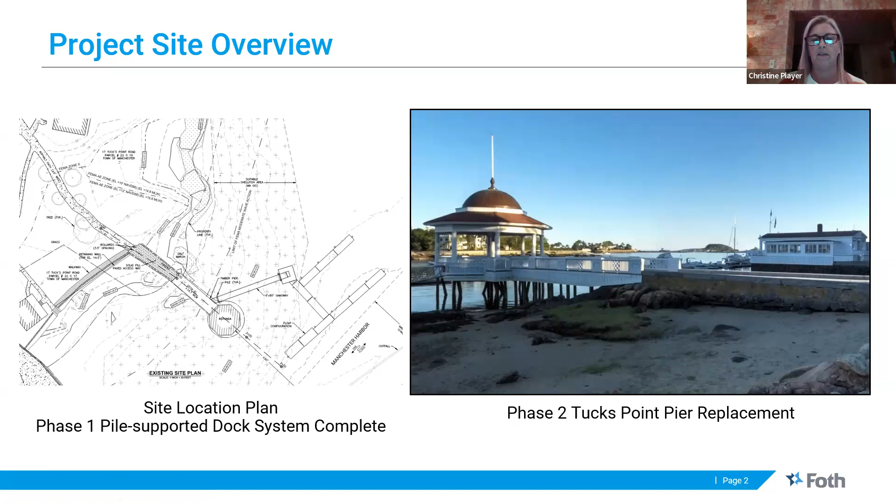So again, just brief overview, context of the project site. I think everyone's familiar with the pier and the rotunda. As I mentioned, about a year and a half ago, we installed a new gangway and pile-supported floating dock system, so that was complete. When we moved forward with that project, the intention was always to phase in the pier repair, and as initially mentioned tonight, the pier itself is in a challenging state. It's quite old. The pilings are getting worn, as I think everyone knows and has seen. We recently did an inspection to allow for the facility to be open this year, but we are looking at it closely. It's on borrowed time.

So the design considerations and the criteria that we use to develop the conceptual alternatives that we're going to discuss a little bit more in detail. We learned a lot from phase one with the installation of the pile system that supports the dock. And that is the project site does not lend itself well to very good soils. As you all see, the outcrops all along Tucks.

We've got poor soil conditions. We've got crazy high bedrock. The bedrock itself isn't of high quality. So what we learned through phase one is the only solution we have out here for piles is a steel type of pile that are actually physically socketed into bedrock.

And that's required for axial and lateral capacity of any of the waterfront infrastructure that we're going to see out at Tucks. So we are sticking with the steel rock socketed piles for the pier, as they were similarly required for the docks that are out there now.

We also are focused on the new pier being ADA accessible. And the goal of this new pier is not only to replace what's out there, but to do it thoughtfully, with consideration for long-term resiliency given all of the future sea level rise and climate change scenarios that we're now being asked as engineers to design for. That would take into consideration a 50-year plus look ahead for this structure, with criteria that address future sea level rise and flooding projections that we've used from the NOAA website, a standard federal site we look to in order to understand the predicted future resulting from climate change.

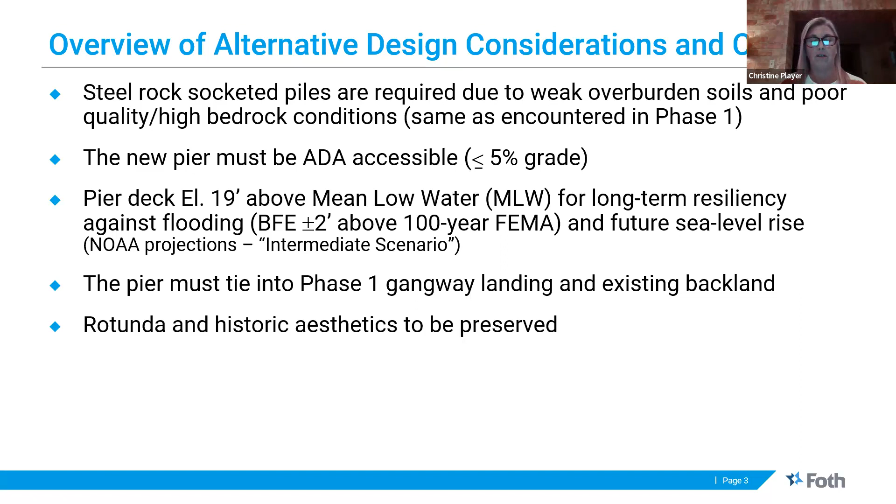When we initially started looking at alternatives, looking at cost benefit, we went through an analysis of different types of materials. As I mentioned, we knew going into the next phase that the new pier cannot be supported by timber piles like they are right now, that we need to go to a steel rock socketed design to resist the lateral and uplift forces we see out at the project site. So there is no alternative being looked at this evening that would utilize timber piles like you see out there now.

A little bit of context: that pier was built back in the early 70s, and it was certainly a bit of a piecemeal effort back in those days. So for a competent, industry-standard design, it is not recommended that we look at timber piles, and that's why we'll continue to move forward with using a steel pipe pile foundation to support the new pier.

Then we looked at the new pier itself - what is that going to be constructed of? We looked at a timber frame alternative versus a steel framed alternative. Everything out there right now is timber. But the advantage of using steel is that you require fewer piles because you can span longer lengths between pile bents. Also, the longevity of steel is certainly maximized compared to a timber alternative, there's less maintenance, and therefore lower capital and maintenance costs associated with a steel framed alternative. That steel framing will be the guts of the pier.

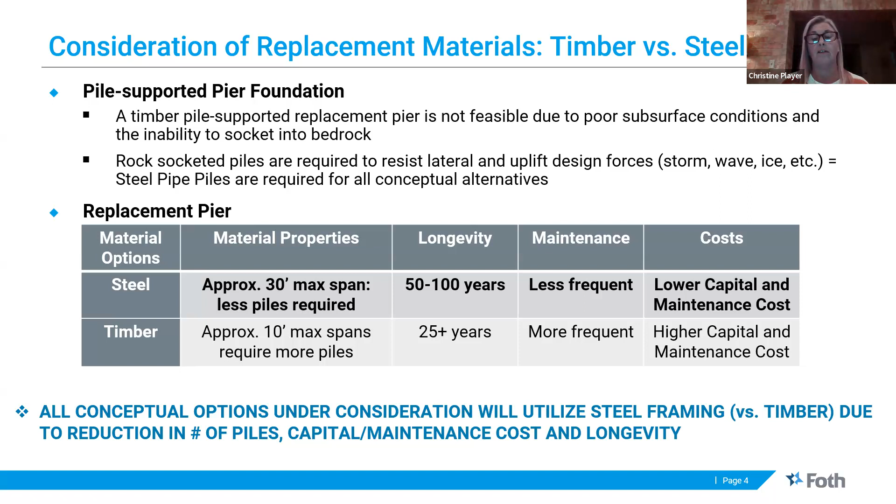Through the two presentations we've given to date, all of this has been presented, and at the end of our last discussion it was decided that the town would focus on moving forward with conceptual options that utilize steel framing versus a timber alternative. Again, that's truly due to the cost benefits we'll see: reduction in number of piles, reduction in capital and maintenance costs, and the longevity associated with selecting steel as the primary material.

So we considered four alternatives, and one has dropped out since our last meeting. Alternative 1, I'll show some typical cross sections and then we'll get into the 3D renderings - essentially reconstructs the pier in the existing footprint. The rotunda will be reset, and everything will look very similar in plan view. However, the deck elevation, currently at 14 above mean low water, will be increased 5 feet, so we're constructing the deck elevation 5 feet higher than it is now.

Alternative 2, which is grayed out and not being considered any further, was an alternative that extended the existing pier footprint about 38 feet more seaward, with the rotunda going out 38 more feet seaward than you see it today.

And similarly, we'd be looking at raising the current deck elevation 5 feet.

Since our last meeting, there have been preliminary discussions with the regulatory agencies, which is a big part of the next steps for moving this project along. Alternative 2 has been dropped primarily because it will likely add an extended timeline to get through the complex and layered regulatory review process, since we're looking at building in an area with no prior construction. Maintaining the current pier footprint is an advantage because it's an authorized structure, and constructing within that existing footprint has a major advantage. Once you go outside that footprint, you encounter challenging permitting review. So it was decided not to pursue an extension of the existing pier and push the rotunda further seaward. Alternative 2 has dropped out of contention.

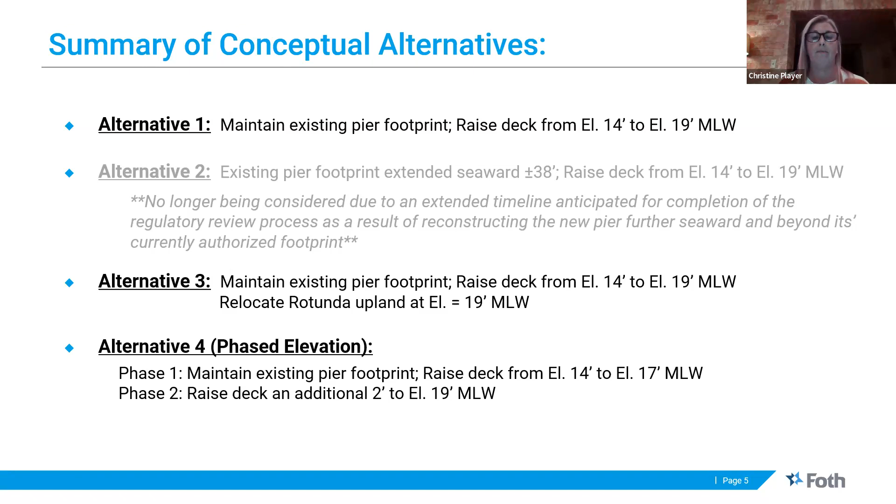So I think decking is a next step conversation. Right now, we've just costed out things on a very high level, assuming timber, but certainly there are other materials out there that might cost a little bit more, but might have lower maintenance options, and may last a little bit longer. So the goal right now is not so much to get caught up in that minutia, knowing that there are other options we can look at. I think the goal here is to identify the alternative to advance, and then these conversations happen when we move forward with a selected alternative. But those things do exist and the conversation should be had. It's just not part of the presentation at this time. It's more important to figure out what alternative to advance, and then we can take it from there.

I have a Zoom question from Sandy.

Sandy Rogers, 82 Old Essex Road. Really quick question, given we've had some pretty high tides, what is the state of the rotunda itself?

And I'm presuming that all of this is keeping the existing structure, or does that structure have to change at all? The idea is to make whatever repairs are needed to the rotunda as part of this project, but from a more general viewpoint, it's to reuse and preserve it. There's work that has to be done in that context, but certainly if there are things that need to be replaced and repaired, the idea is not to replace the structure, it's to reuse and preserve as much of that structure as possible as part of this project.

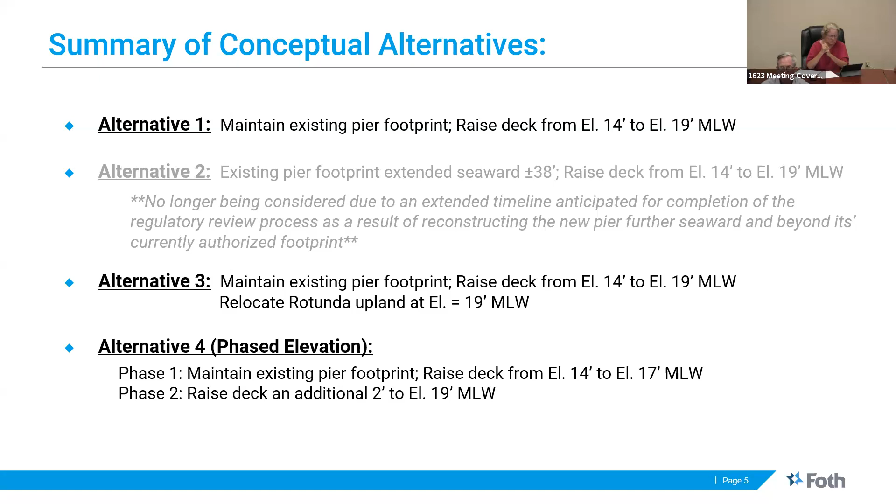Great, thanks. I have a question from Jim Starkey. Yes, Jim Starkey, still at 13 Tux Point Road.

I would just like to point out that we know we need to go to 17, but we don't know when we need to go to 19. And since nobody has a good crystal ball and nobody has anything approaching a verifiable model on this, 19 might not be enough. And if we needed to go to 23 or 21, money spent raising it to 19 would be completely wasted. So I think giving us the flexibility when we have completely no idea what the science is going to turn out to be is a very important thing. Thank you.

Just to note, the cost differential between phase one of alternate 4 and alternate 1 is pretty minimal, a couple hundred thousand dollars. I think that's your next slide, Christine.

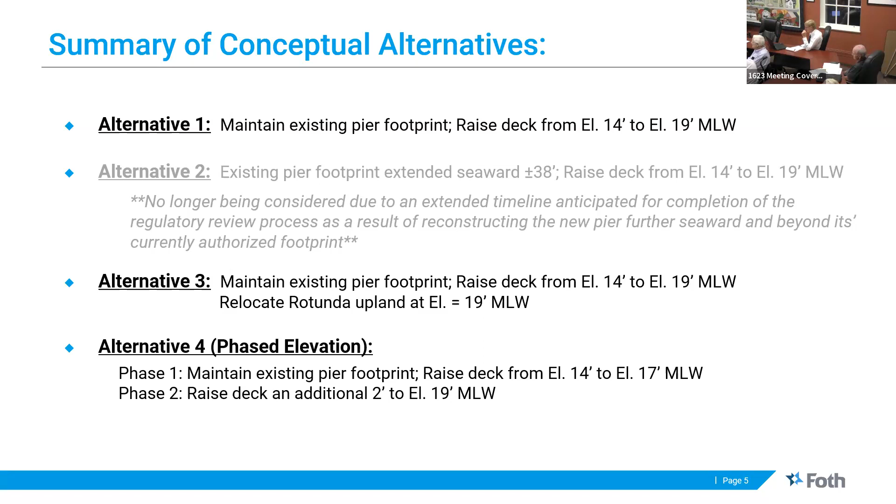Oh, Christine, so okay, why don't you make sure everyone's done talking. Why has my—oh, you've got to be kidding me. Well, we're frozen.

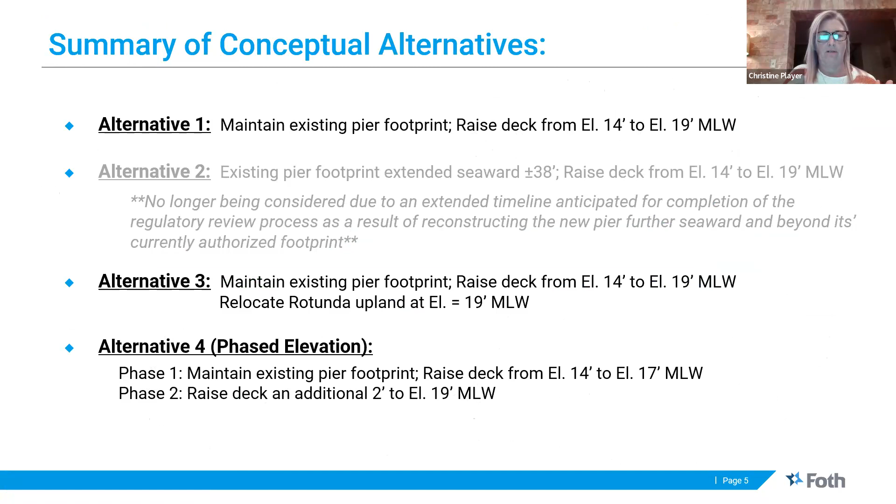Yep, we're unfrozen. Do you want to go to cost right now, or do you want to just kind of quickly look at what these look like? Your call. Quickly through the remaining slides, but please try and be brief.

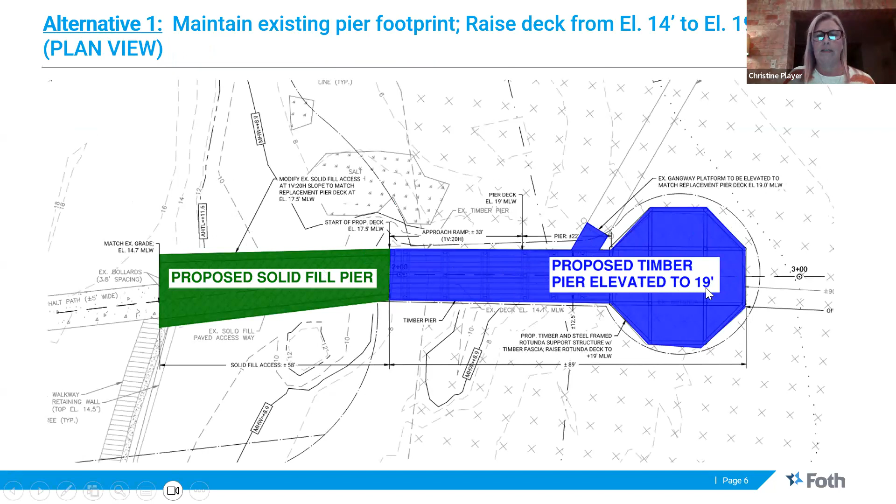Sure thing. So these are just real quick viewpoints of plan views of each alternative, just to get the idea—we've got a solid fill pier, we've got the existing pile supported timber structure with the new gangway platform and the rotunda platform. Alternative 1 will elevate this blue section from 14 to 19, like we said, and the solid fill pier will ramp up to meet the new structure. You can see that in this cross section.

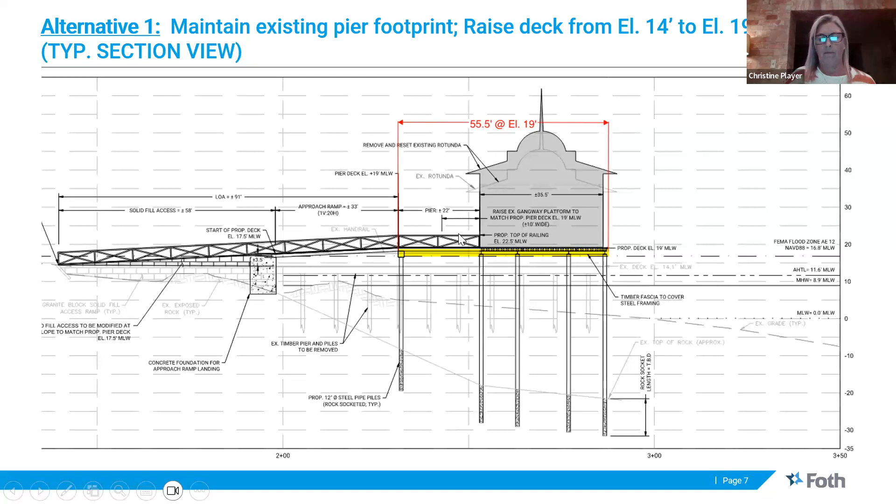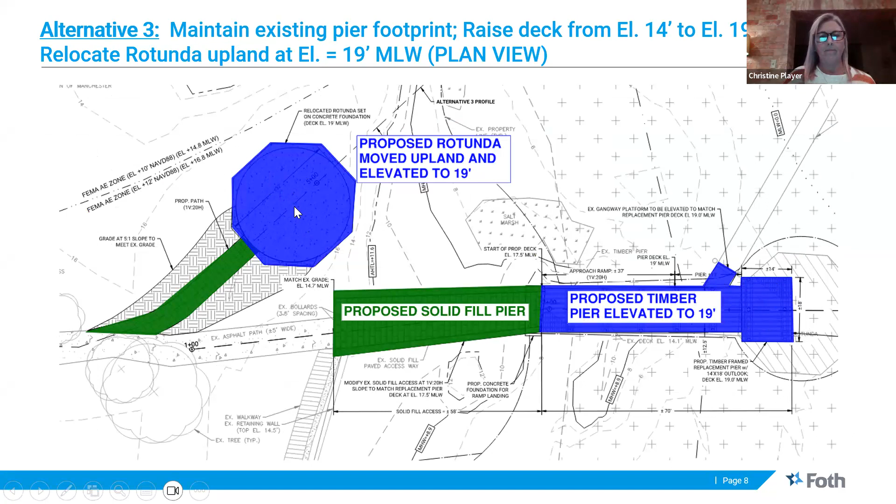Alternative 3, as we talked about, the difference being we dead end the current configuration for more of a viewing area, and now the rotunda is moved out on the outcrop a little bit to the north. Similarly, we still have to ramp up because the grade elevation at the backland isn't changing—we're trying to get to 19, so there's a very gradual ramp up. Then we have a flat elevation of 19, about 37 feet long, ties into the gangway, which is here. But we square off the end, and then the rotunda will be out on the outcrop, at elevation 19, and that would be just on a concrete platform.

I have a question from Sarah Pierce.

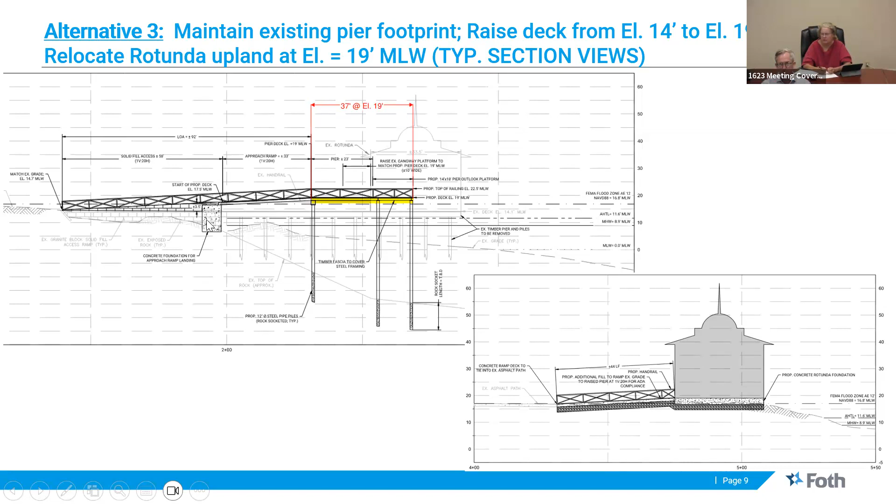The short answer is that the new piece of buttressing is currently scheduled to be concrete rather than granite, but we could change that - that's a detail, and we could change it later, after we've chosen one approach and gone into finer engineering. There's ways to put granite facades, there's all kinds of nice aesthetics we can talk about. Again, going back to the idea of making the selection of the alternative and then really honing in on these kinds of details - but that option is there.

Did that answer your question? Yes, I wasn't aware of the large concrete section after you're doing the initial ramping up. I just also had a question - has there been any settling of the area where you're adding the block? Which I think would, in all honesty, look very industrial if you just left it as concrete blocks above grade. That's just my opinion, but other than that, I just wondered if it's settled in that area.

So this is all built on rock - you can see the outcrop. So there's not a lot of settling going on because underneath is the ledge, and that is a desirable foundation for the type of loads that are going to be on here. It's pedestrian loading, and we're not putting cranes and big heavy equipment here, so we wouldn't expect to see settling with this proposed alternative.

I thought previously you said that we had issues with the rock outcropping quality or something - maybe I misunderstood you. So that is for the support of the piles, that only pertains to the piles and socketing these piles. The piles have very different loads - they're in the water, they have wave action, they have ice action. There's a lot of different things going on with the pile based on pile design versus this type of design for a stub abutment. The rock should be fine to support this, but we need to get the piles into competent rock and socket them in place for the forces that are going to be acting on the piles.

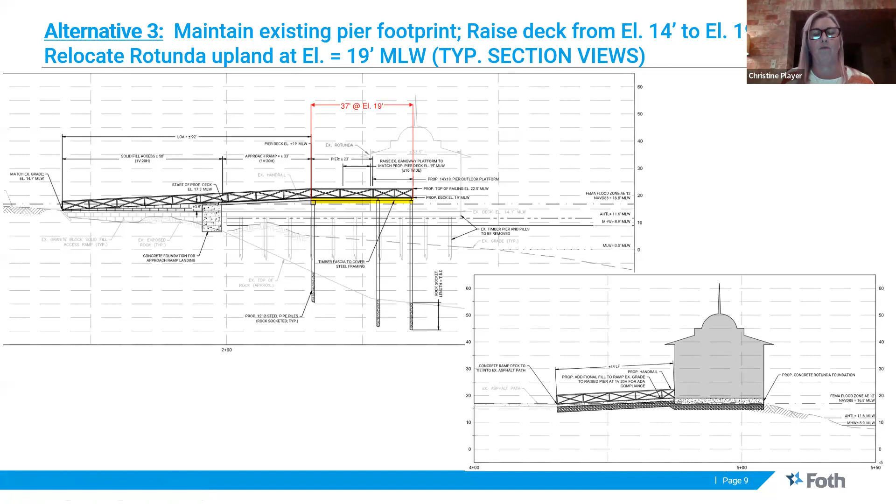Okay, great. Thank you for clarifying that.

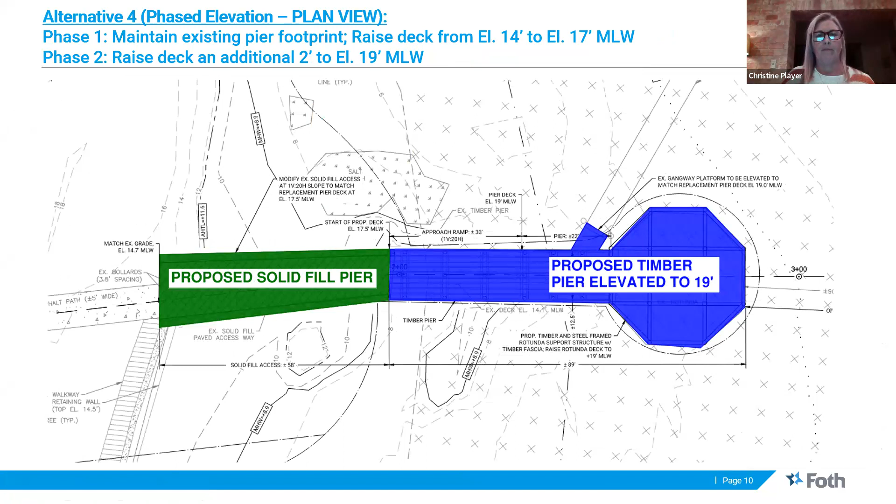Sure, all set with this one, moving on to the next - this is our phased approach, again very similar to alternative 1, same idea that we're ramping up, but this is only phase 1. We don't have to do anything to the solid fill that we were just talking about - that can maintain its same elevation. We're not adding any courses because we're able to maintain ADA accessibility, ramping up to the same flat elevation of 19 like alternative 1, but because we're only going to 17, we don't need to get this area elevated so that we maintain the slope approaching the pier, because we're only going to 17.

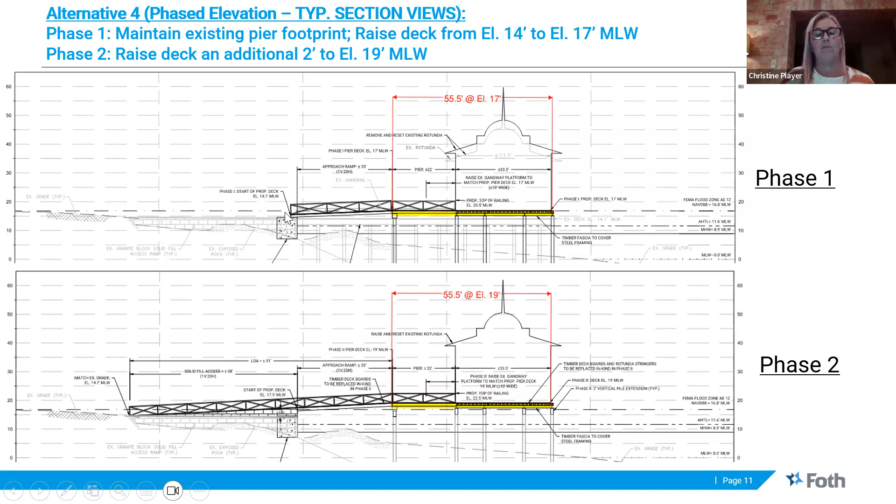When you get to phase 2, we're going back to the final elevation that alternative 1 accomplishes, and that's 19 feet. You'll see the same thing here. Now we have to add more to the solid fill because we need to keep the ramp slope ADA compliant, and to get up to 19 we have to bring this back further and ramp up. So that's where you see the change. One advantage of the phased approach is that you're not required to do anything to the solid fill area, that granite block area, immediately, but that would be modified to transition from phase 1 to phase 2 to get the pier to its final elevation of 19.

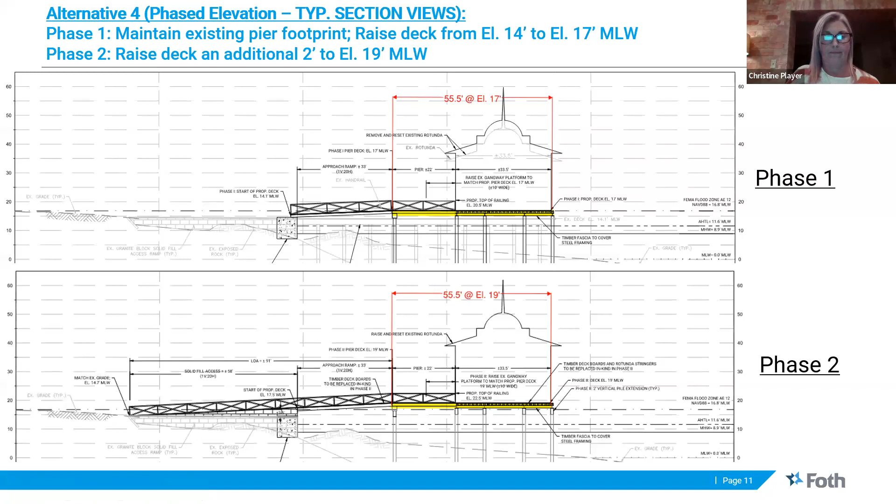So, yes, here's some... oh sorry. I just have a very quick question. So is the phase 1 estimate 2.16, and then in 25 years another 3.59, or is it? Let's get the picture up first. So that's an additional, she just said, yeah, so. Yeah, so basically, 25 years.

What we've done is costed these as very rough cost estimates just to give context for what each alternative comparatively offers the town. You can see with alternative 1, we're at 2.25 million. Alternative 3, where the rotunda is going upland, is a little less money, 1.75 million. But when you get into the phased approach, phase 1 only goes to 2.16. It's a little less than alternative 1 because we don't have to do anything to the granite block approach area. So that's your initial investment.

Assuming phase 2 happens 25 years out, we're able to project costs based on roughly a 3 to 4% increase to material costs due to inflation. So it would cost $3.5 million to take the phase 1 structure and convert it and elevate it to accomplish a deck elevation of 19, which in the end gets you to alternative 1. So when you add phase 1 to phase 2, albeit over a 30-year period, you're investing more money because things cost more in 25 to 30 years. So the total cost is 5.7 million with that escalated projection added on to get you through phase 2 so that you accomplish the deck elevation of 19.

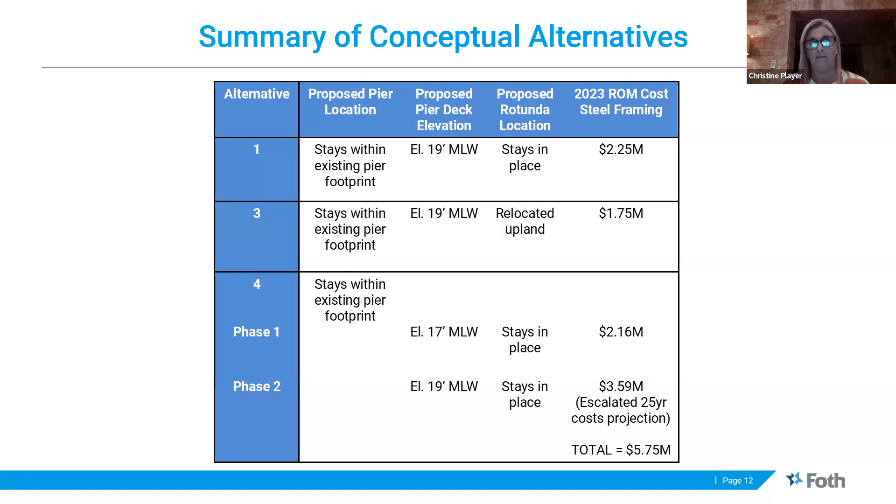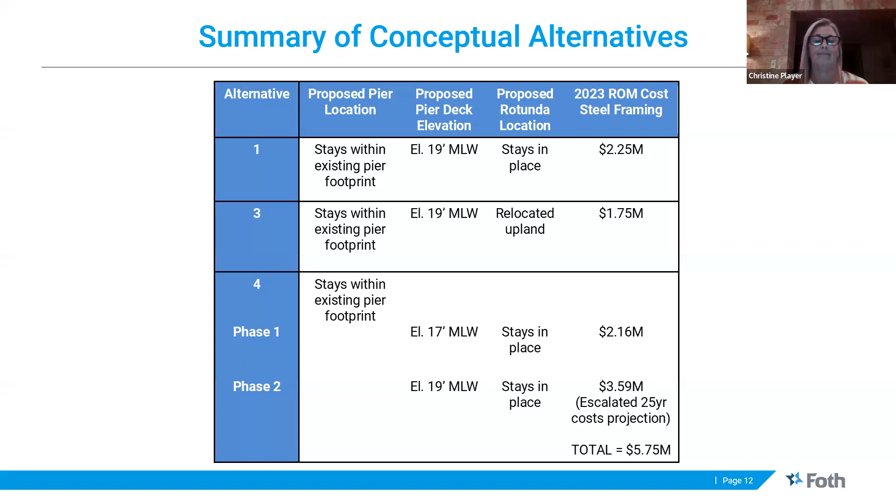But it looks like a big number because it's 25 years out. And if I thought 25 years ago what a project like this would cost, and I see what it costs now, that number really doesn't seem that bad, because this type of project 25 years ago certainly didn't cost $2 million.

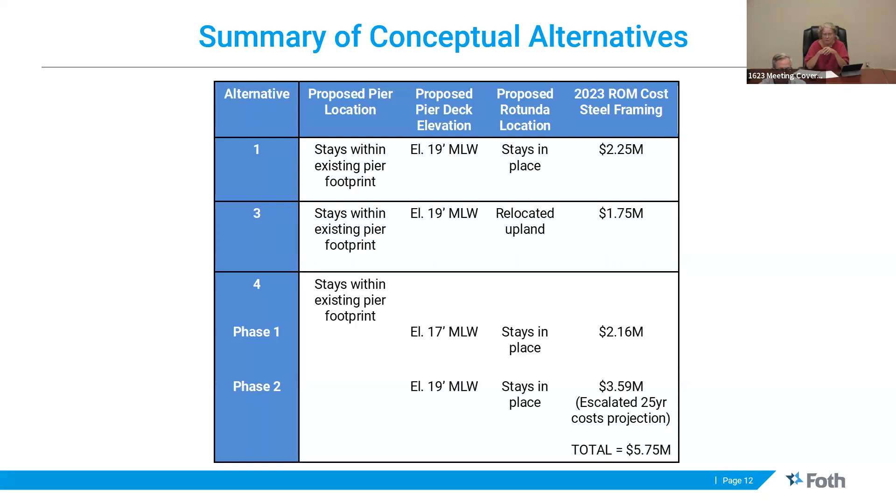I don't see any hands. Oh, do I see a hand? No. Okay, can we go on to the next?

So we're moving to the renderings, and I'm hoping that you guys can really see these things. We're trying to compare things side by side to give you the visual experience that we took away from comments last time. So I'm just going to walk through the three alternatives. Hopefully visually you guys can see everything clearly, but I think it's really about just generating the conversation.

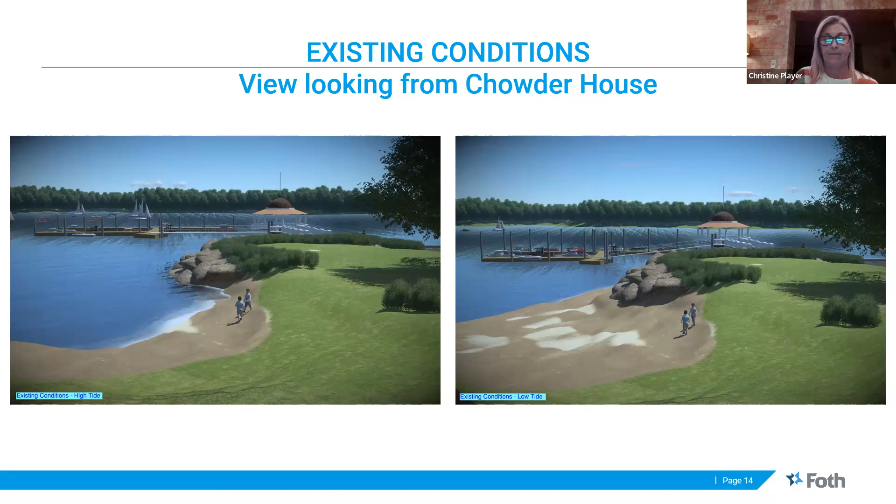Looking from the other view we've selected to share with you folks, what does it look like during the two different tide events currently. So when you're on the beach, at high tide you're not seeing a lot of the exposed pilings, but at low tide you are. And these pilings are timber right now, so they're that dark creosote-coated timber that you see out there now. So this is just trying to put the context of what you see now from both of these viewpoints.

And then the next slides. Before we go to the next slide, I have a question - Carly Cook, One Masco Street.

And that's just a normal, everyday high tide? That's not an extreme tide, or a storm tide? That's just a regular 10-foot typical high tide? Yep, if you were on the call for the last presentation, we had a video of an extreme event and the whole deck is underwater. So this is not that - this is typical daily tides that we're showing.

If I may, the last few times I've seen it recently, the bottom rail is completely submerged, and it's not a full moon or anything like that - it's just a regular tide. I would like to say, because I've seen at a regular high tide, not a moon tide or storm tide, it does appear to look higher than that, and I have photos I could show. I think what they're probably using is mean high water and mean low water, not extreme conditions. With the full moon or new moon we do get higher tides - right now the tide is 8.5 feet or something, and on the full moon it's going to be 11 plus feet, so that's the difference you're seeing with the moon phases. Let's not have a conversation between - may I just ask a question?

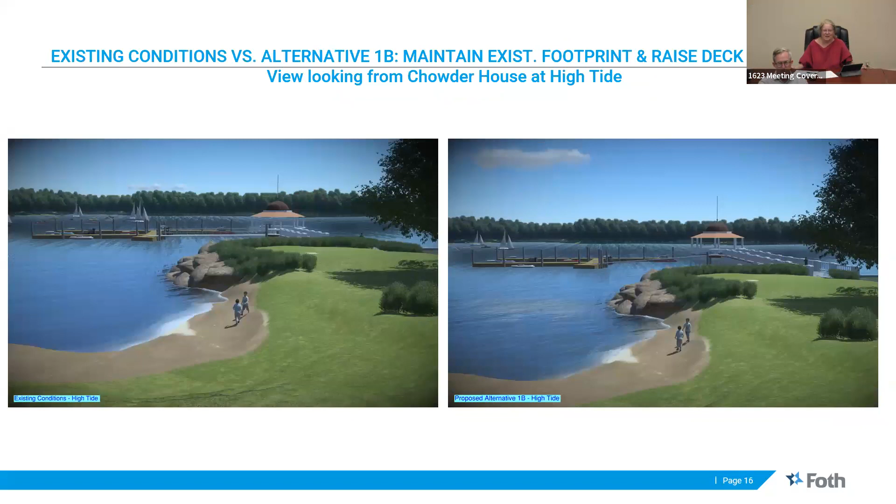So what we're trying to do in the next round of slides is take each of the alternatives we just discussed, 1B, 3B, and 4B. The B just signifies when we did the initial concepts, A was timber frame and B was steel frame, but we've gotten past that. Everything's going to be steel frame now.

So this is your existing conditions out there now, and what we're trying to compare with these side-by-side renderings is what it will look like, alternative one, when the deck ramps up to a new elevation of 19 under the same tidal conditions. Right now you see pretty much a flat gangway at high tide, but because everything's coming up 5 feet, now you've got some ramping on your gangway. It just makes sense, things are coming up higher.

The idea is to give you the visual of what it's going to look like when this deck goes up to 19 during typical high tide conditions.

One thing I'll point out from phase one, I don't know if you can see it clear on the screen, but the top of the pilings now supporting the float were designed for future high tides. One advantage to raising this elevation is it puts it into a more normalized context. You're bringing up this platform and that view is now higher.

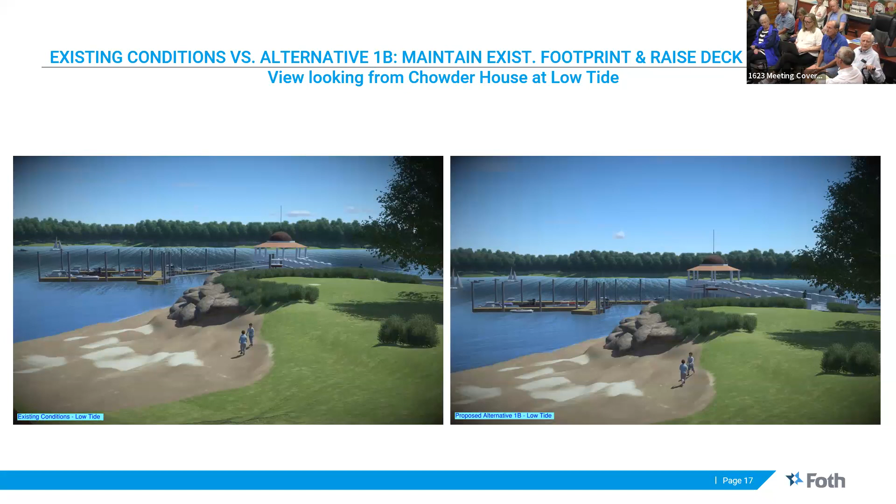And who knows about tsunamis, and the Canary Islands starting to fall apart. Let's go see how the renderings look of those, but I appreciate your points.

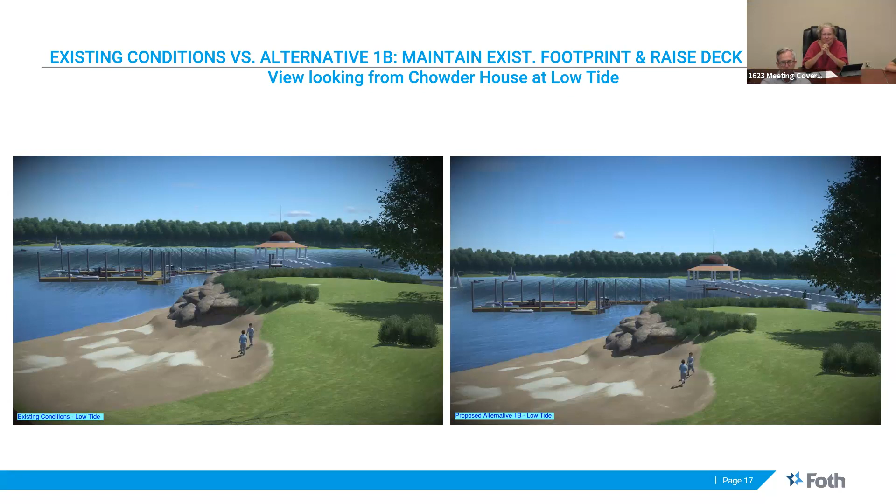This is the view at low tide, exposed pilings. Again, we just have a little taller piles, but this is what the view would look like comparatively—what's there now versus what there would be resulting from implementing alternative 1 and raising the deck 5 feet.

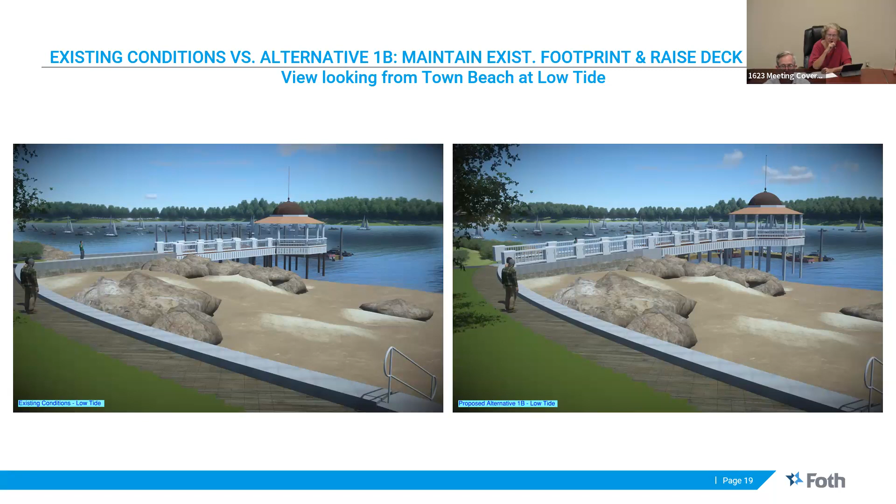Oh, you mean the low tide? Oh, the high tide mark. So kids who jump off at low tide don't generally graduate. No, but even at high tide, it would still be a higher drop. It's a bigger drop. You're gonna have to be a braver kid. Shorter, yeah.

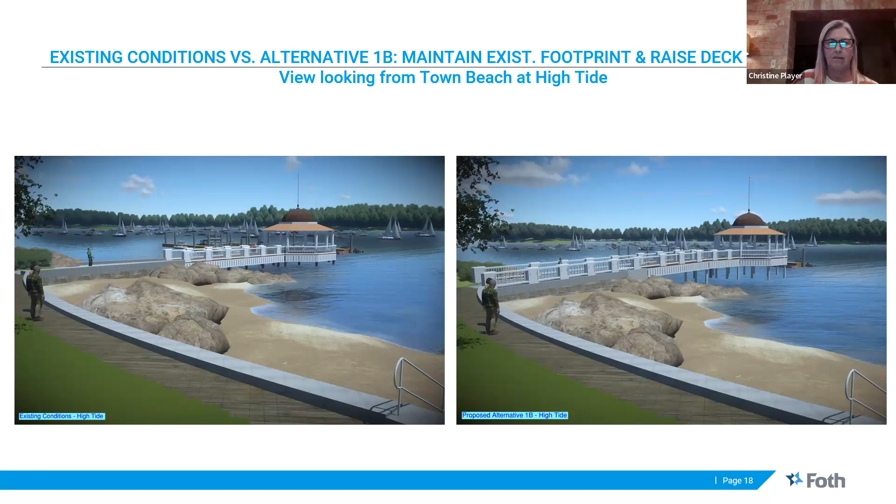I think that's kind of outside the scope of this. Right, but we're concerned, so many people, about having it in the water. And so if it wasn't that lengthy path from the beginning, why are we so concerned about it? When it was originally built, it went out into what is now the channel. It went out probably twice as far. It was shallow. It was much further out.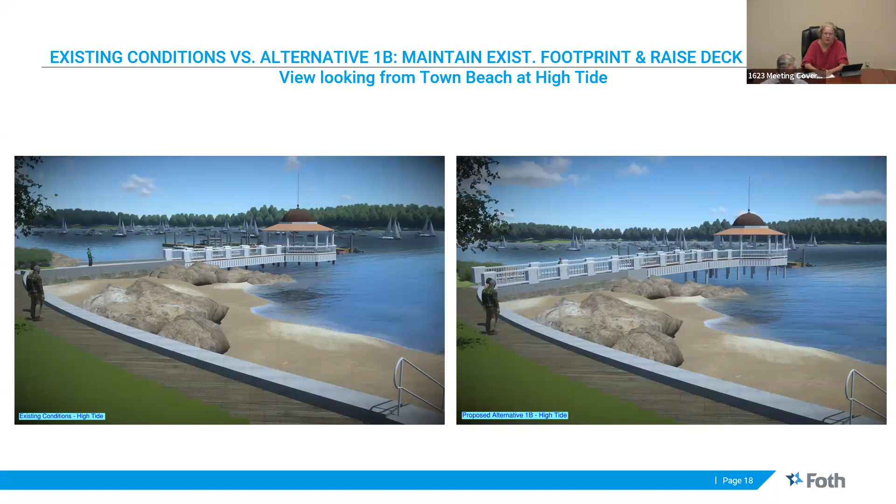Sorry, enough of a diversion to amuse Ann. Let's see the next set of slides. So we're going to the next alternative.

Similarly, at low tide. Steve Lawver, 97 Pine Street: So what would the elevation be if the rotunda was on the knoll? That's at 19 as well, so the rotunda will be at the same deck elevation as the pier.

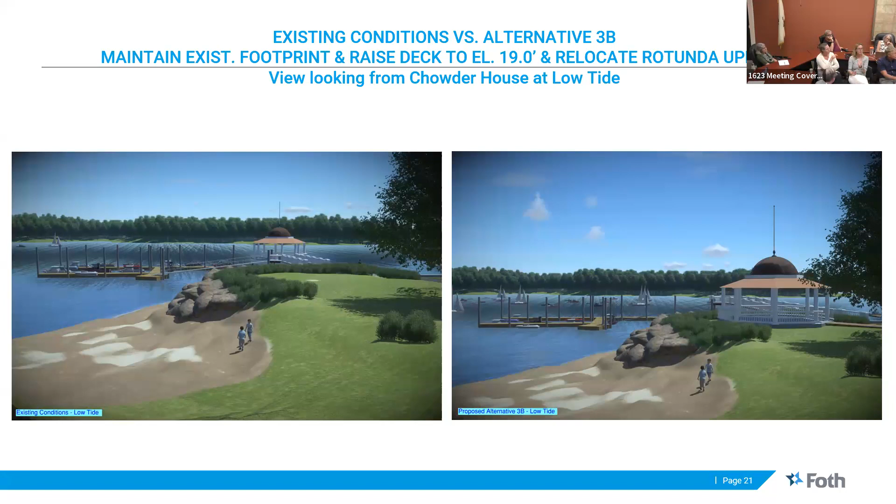Monica Taylor, Proctor Street: What's at the end of the pier though? You'll see that in the next view. Yeah, so again, because the rotunda on the knoll is blocking your clear sight line to the pier, but from the beach, you can definitely see the difference, right?

We're dead-ending to more of a viewing platform. You could put benches out there. We could talk about what the final desired size is for this viewing area, but you can see a very different look to the pier without the rotunda. This again is comparing the water at high tide, but there's definitely a different look. The pier is just as long as it is, it's just that we're squaring off the end, and it doesn't have the big octagonal shape to support the rotunda.

And then at low tide, again, I think you see that—because we're limiting ourselves to two different viewpoints—certainly from the beach area it has a different feel and look to it than from the other viewpoint.

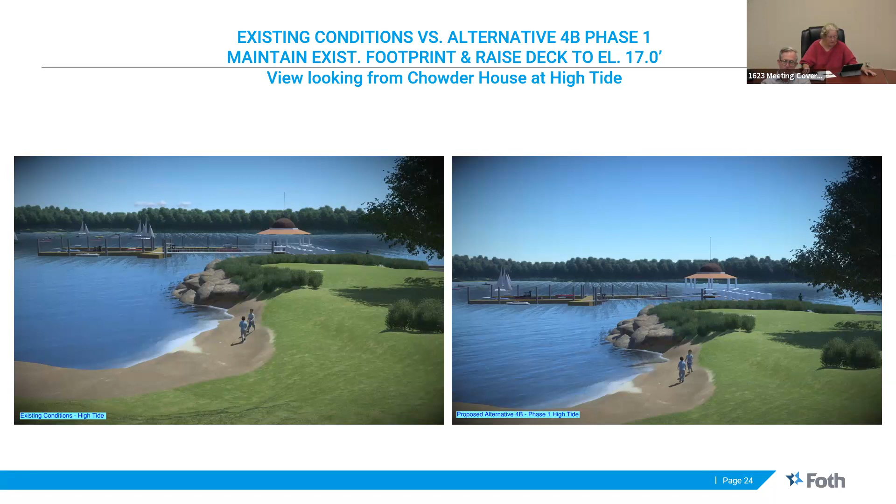Okay, hand is down. Can we go to the next slide? So now we're looking at the high tide of phase one for alternative 4, and the difference compared to existing is we're only elevating to 17. Again, it's 2 feet less than the final 19 elevation. So there's a little visual difference when you look at high tide compared to low tide. This view, it's hard to see, but we're only elevating the deck to 17 under phase one.

And similarly, Joan Logan, you have your hand up again. The floor is yours. I don't know whether you're still muted or. Yeah, I'm sorry, I was muted, I'm sorry.

That's fine. I'm asking why, if this was the case, when the pier was extended, why wasn't this option given to us at the moment to raise Tucks Point at the same time, the rotunda? Why couldn't the rotunda be raised then? Why are we putting this all out this time later if this was discussed at that moment and it was considered that we needed to raise it at that time? Am I clear, is my question clear, or am I not? Let me restate it in case you would like to know why it is that we did a whole bunch of work on the floats, and now we're coming around for a second time to do a whole bunch of construction in the same area. Why didn't we do it all at once? Is that fair? That is correct. Thank you very much. Yes, thank you.

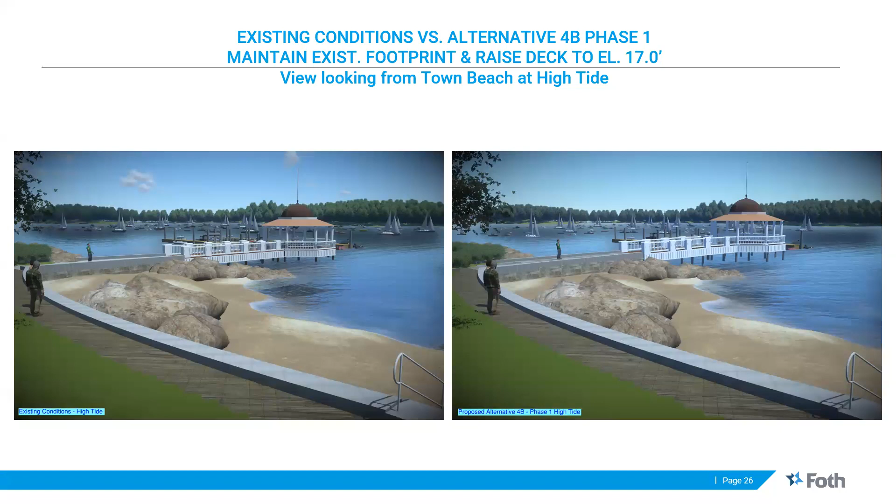I do want to point out again, we talked about it, but trying to share visual observations, because you're only going to 17, we don't have that railing here right now because we're not changing that solid fill, since we didn't have to ramp it up to accommodate an elevation of 17. I wanted to point that out because I know people were noticing that the railing on the other alternatives came further back, and that is because we had to elevate the fill to get everything up to 19 in all one construction event. But here with the intermediate, you don't necessarily need to deal with that right now because we don't have to do anything to that solid fill area, the granite block area.

Ronnie, you have a question? Are we done with this? I just want to talk about the tide a little bit and the facts of what the tide is really doing and what we need to deal with, not some 6-foot rise or some such thing.

This is Mr. Capello, Lenny Capello speaking. But only because whomever is going to be doing the minutes, thank you.

Go ahead, can I just give a little background? I was born here, class of '68 in high school, studied oceanography, marine and coastal geology at Penn State, 30 years in the Navy, worried about the tide every day. And I've seen tides all over the world. The experts on our tides are NOAA, the National Oceanic and Atmospheric Administration.

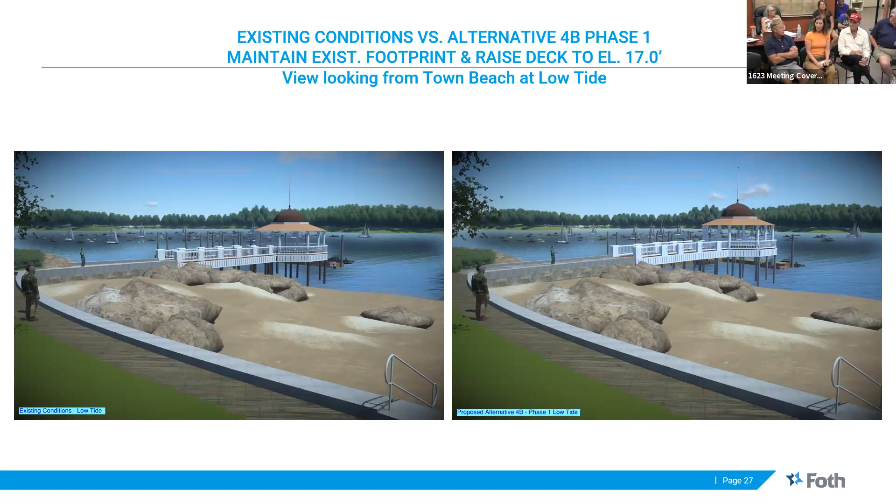Are we done with that? I want to hear from everybody who is willing to speak. I have one question: on option one versus option four, is the stone pier being changed in either of them?

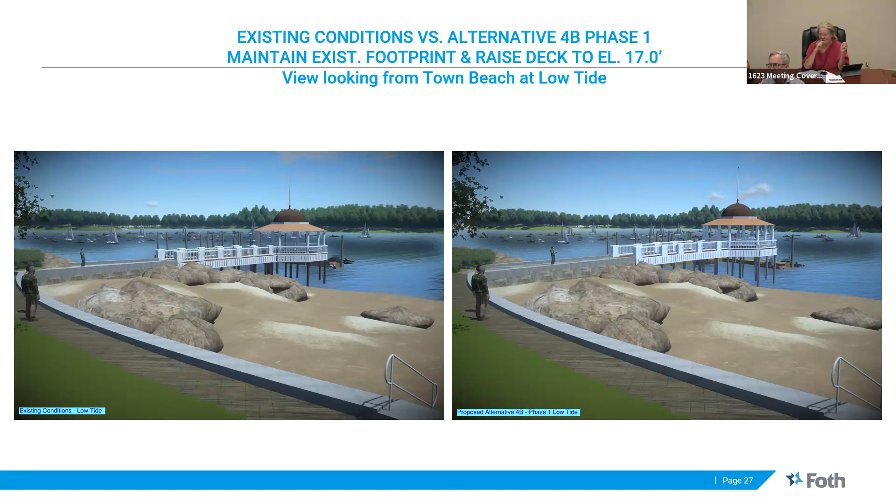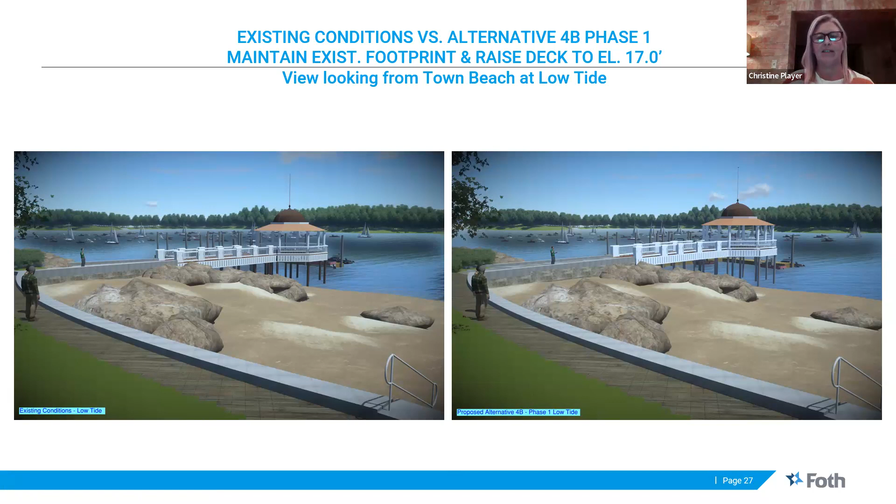So under option 4, phase 1, the stone pier does not have to change, but to go into phase 2 it's gonna be elevated just like it is in option 1, because you're getting to the total elevation of 19. So when you look, and I can go back quickly, hopefully if my computer cooperates.

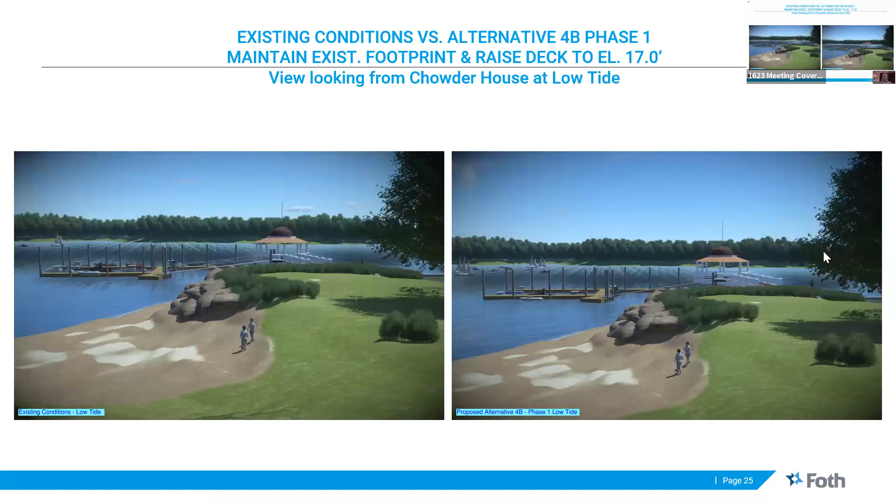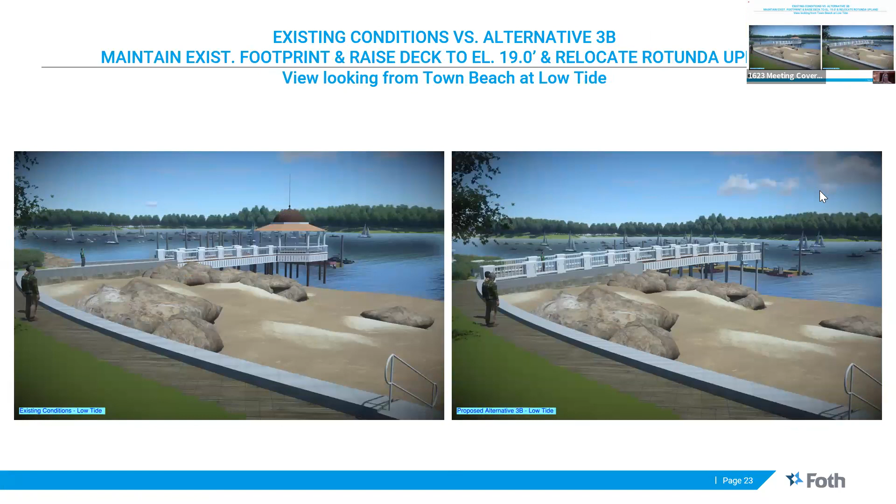So yeah, I think we're confused between option one and alternative one. Okay, yeah, well I think there's, yeah, phase 1 of 4. Change? She said it doesn't have to change. It's not what she said.

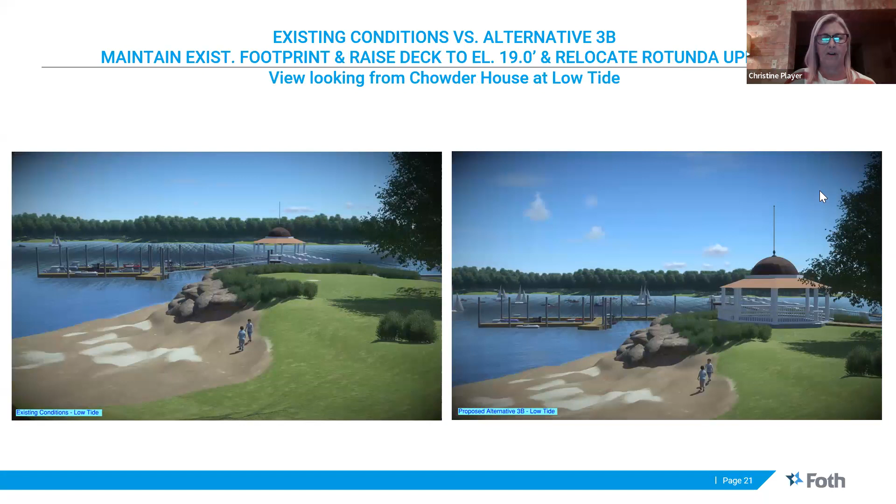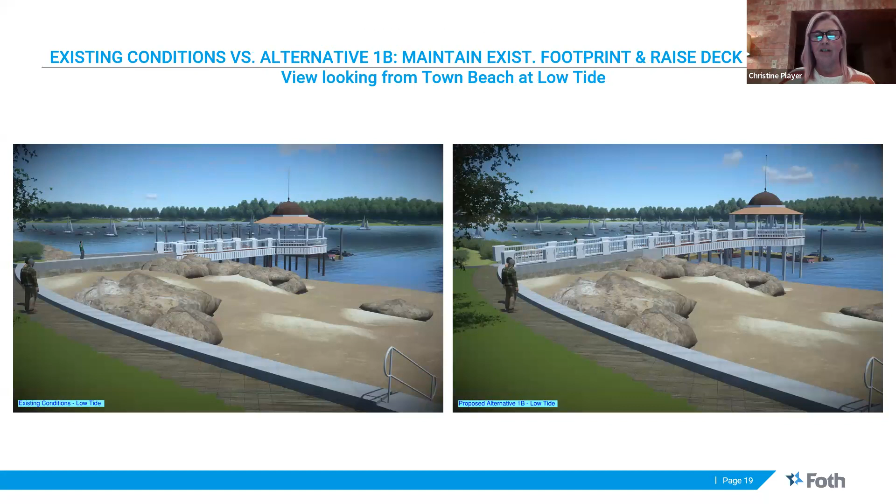Phase 1 does not change the solid fill pier for option 4, but I'm trying to go back, my computer is not cooperating, I'm sorry. In the end, phase 2, here we go, phase 2, it is gonna have to ramp up to get us all the way up to 19 when you elevate it.

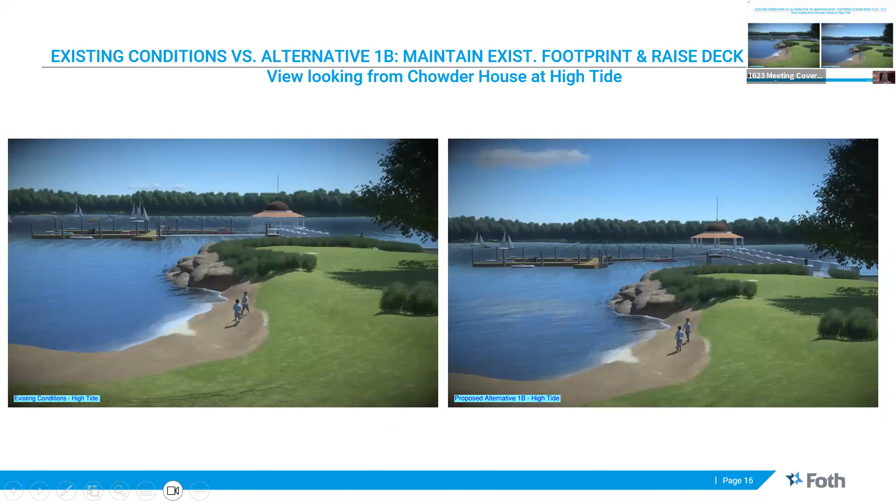Oh, now it's behaving badly. Let's go back here. So it's not until phase 2 that you're gonna have to change the solid fill pier, and now my computer's totally wigging out. That was the last slide, other than a question and answer slide.

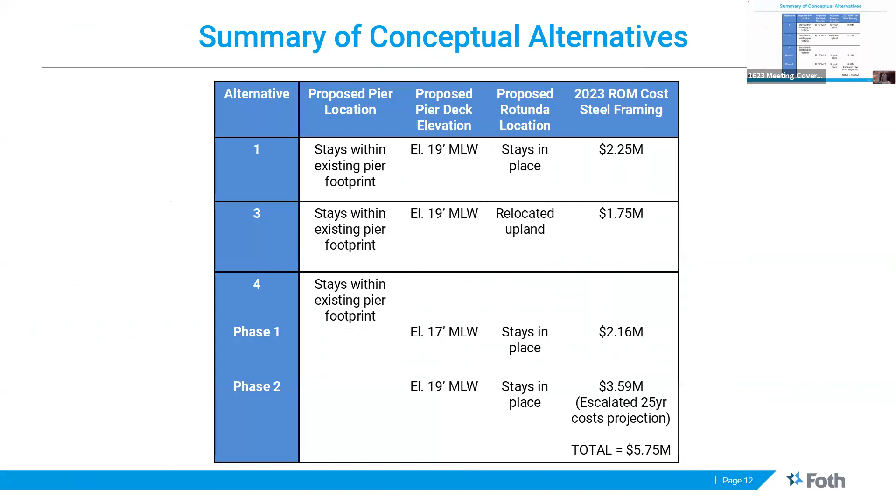Okay, yikes, fine. Then let's just go to questions and answers and comments. You can, it's true. Okay. Rather than having a private conversation, could...

I guess the point I want to add is if we don't have to change the stone pier at all to raise it 2 feet and we can still deal with the tide, then the price difference is a lot different than what Tom just talked about. It's not just a $90,000 difference.

Christine, do you think we shouldn't have to move the stone pier at all? Do you have the price slide? I do. Well, yeah, lots of people do, but I'd like to see it on the screen.

I was hoping by getting out of it, it would stop wigging out. Hold on one second. There we go. Ugh, I apologize, it's just such a big file with all these images. That's the one, yep. I'm not going to go into the fancy pants zooming in, it's just not behaving well.

So here is the difference that we're seeing. And she had said several times that these are very crude, high level estimates. Yes, they are. I would say, and we talked about it last time, we really do have to get our eyes into that rotunda.

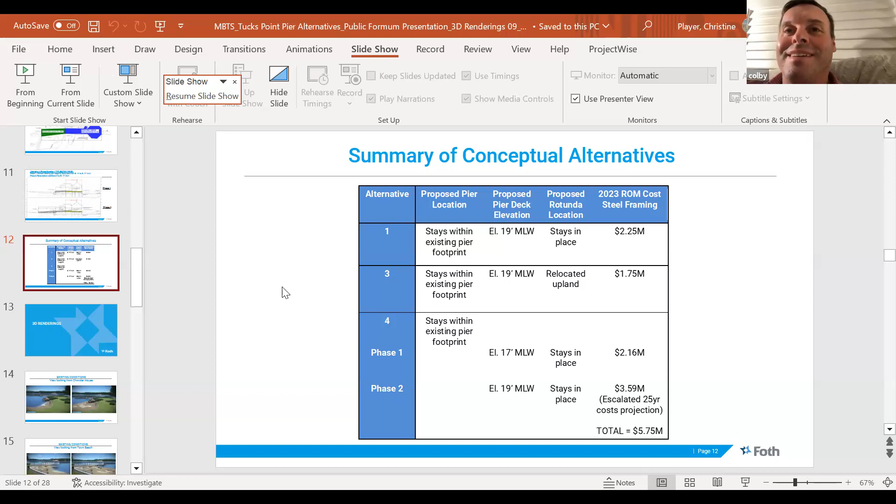Well, you guys are amazing, so thank you for that. I come from a building background, and I think maybe the win-win is, I'm looking down the house right now and I have 4 kids, and they use Legos a lot. One of the cool things about Legos is you can pile them on top of each other. So is there a win-win where, I do also believe the cost to change the solid structure will be more than you guys think it will be, but if we design the raisable rotunda in such a way that additional Lego blocks could be added as spacers to add it up if we need to, then could it just be as simple as unbolting it, craning it up, throwing some more spacers in? I'm sure there's even a better way than that, but a win-win. Thank you.

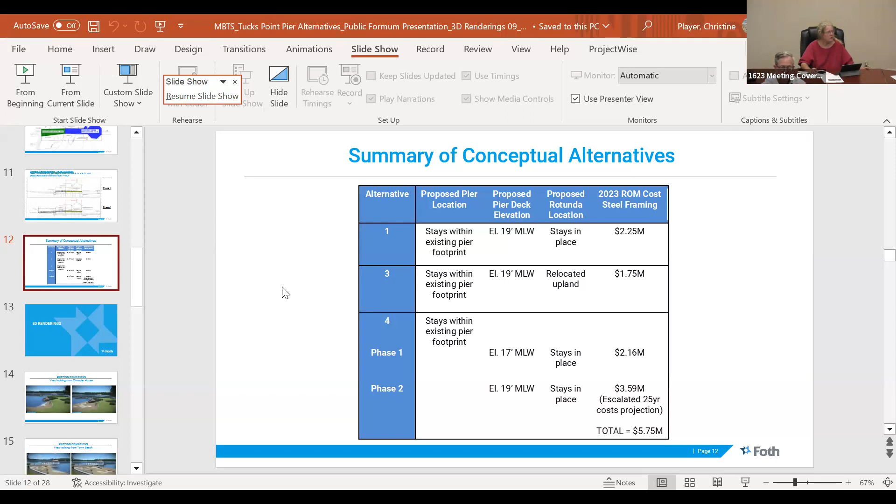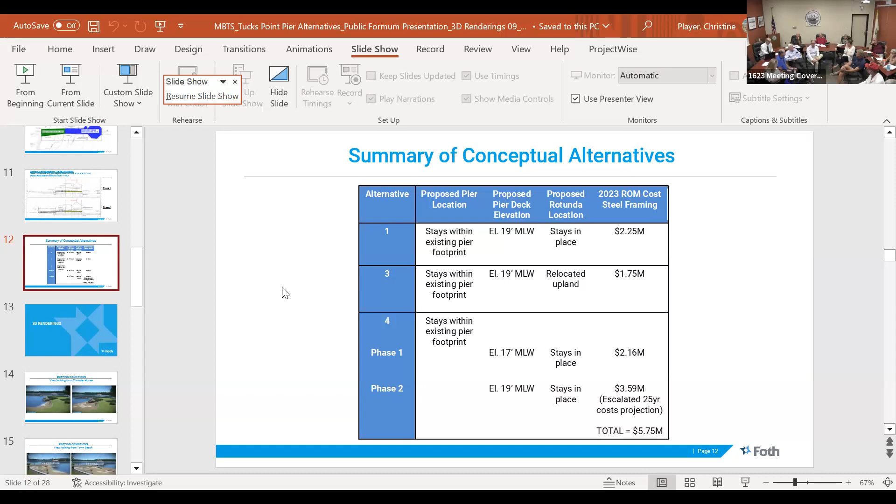Okay, is there anyone else who's willing to go beyond 9 o'clock? Seriously, this is a big decision, and I do want to hear from anybody who wants to speak.

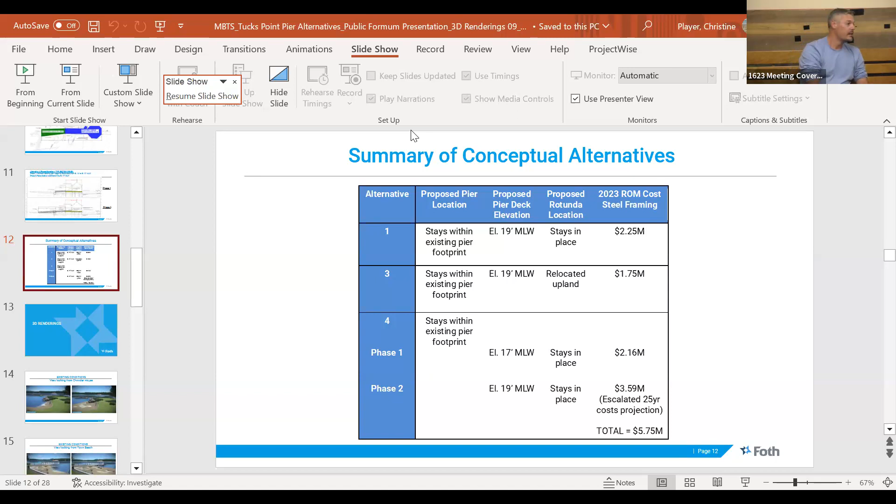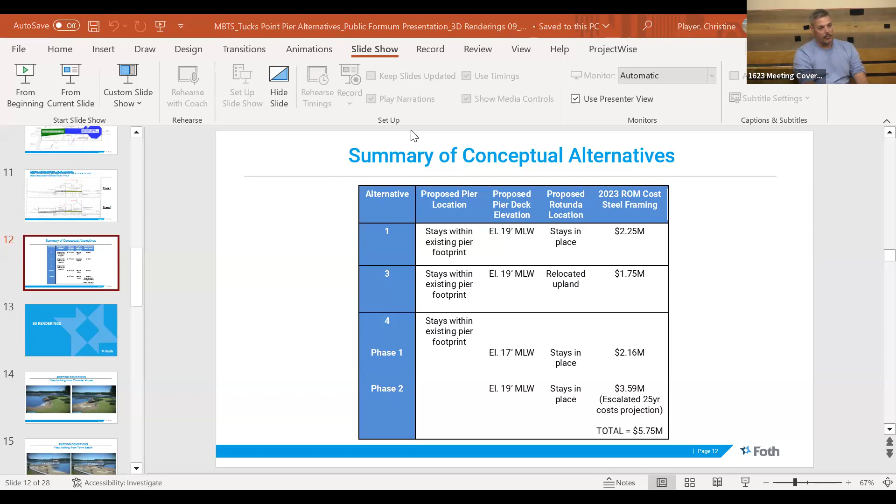Justin Davis, Highland Avenue. My wife and I moved to this area about 8 years ago, we've been in Manchester for about 4 years now, we've had our kids here. We do summer parties at Tucks Point, we live within walking distance and we see the Hodens there quite a bit. Sometimes I think they might get a little tired of our kids, but they're wild, crazy, and love Tucks Point. I'll point out we have this very nice quilt up here that I've been looking at, with this beautiful picture of the rotunda sitting out in the middle of the water. With the parties we have, inviting people from far and wide, they love coming out to it. My kids love running off of it, I don't love them jumping off of it, but they do it anyway. I think the town would really lose something special if we move that. So I don't know how high we need to go, but I think we should keep it where it is. Thanks.